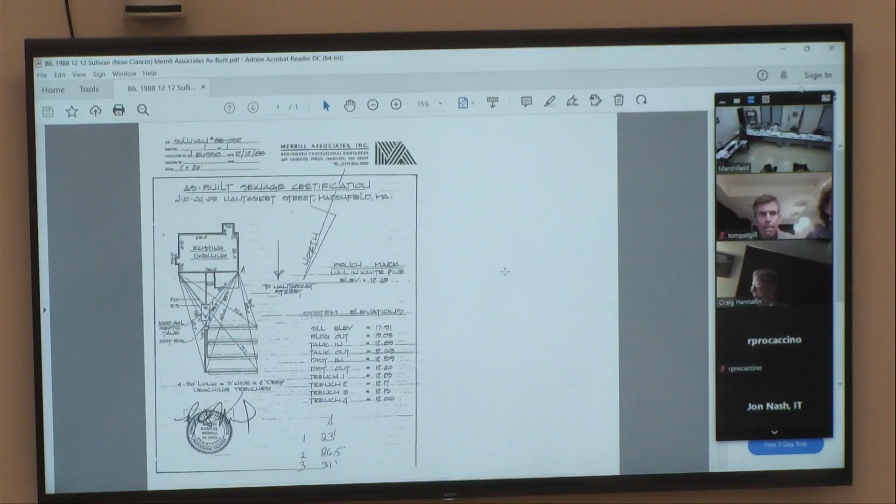So in compliance with the regulations, Massachusetts General Laws Chapter 131 Section 40, Wetlands Protection Act, Code of Town of Marshfield Chapter 294, Wetlands Protection, public hearing will be held for the Marshfield Conservation Commission on Tuesday, February 15th, 2022, to consider the request for determination of applicability filed by Thomas and Patricia Gill, 52 Jackson Street. And the hearing officer is Rick.

Okay, thank you, Bert. So this is a new RDA that we had asked for in one of the earlier meetings, essentially to fill the crawl space in order to make this property FEMA floodplain compliant. The resource areas are Barrier Beach, coastal dune, and land subject to coastal storm flowage. And I can see the taxes are paid. Somebody here that wants to give a quick description of the remaining work to be done to complete the project?

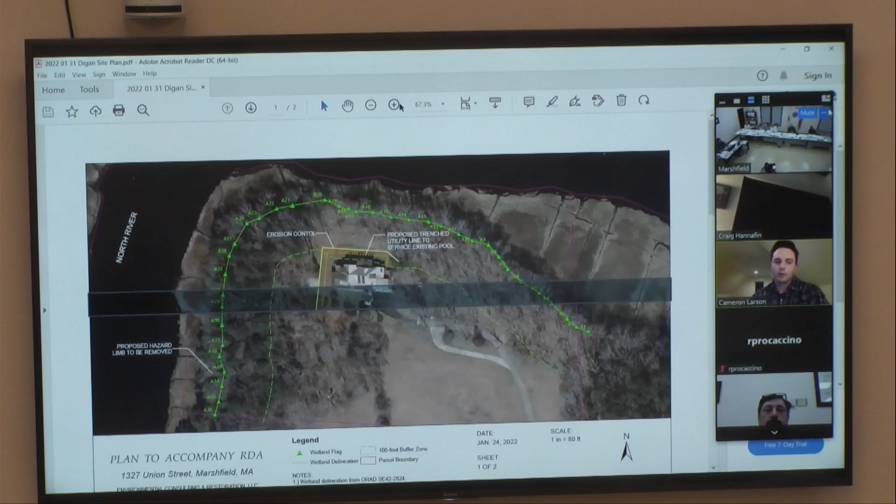The second part of this is the removal of a hazard limb on a red maple down by the dock on this property. Thank you, Bill, sorry. The removal of the limb is on a maple that overhangs a dock. It's severely decayed and poses a risk to the new dock on the property. At this point, the limb has actually been removed. There was a miscommunication on whether that was okay or not.

So we're looking to permit the removal of that through this application, but it has been removed. It was removed by hand, it was just the limb, the red maple itself remains. There was no disturbance to the wetland or vicinity of that tree, and that limb was disposed of off-site. So the two parts of this project are the utility line and the limb removal. We will utilize erosion controls during the installation of the utility, and again, once that's completed, the site will be stabilized. So if the commission has any questions, I'd be happy to address those.

Bill, administrative comments? Well, we were out there, Bert and Susan, Karen, and I, and we were with Brad and did notice the tree limb was missing, and decided that we've all been down the road a little bit too much on this property, and just asked that you remind them that they need to get permits in certain areas, that's all.

On your own recognizance on that. There was also, I don't think there's any issues with the utility line because it's in a lawned area, I think we're all okay with that. But when we were walking around, there's a black corrugated pipe coming out from the pool, it's discharging into the fringe of the wooded area, and we asked Brad to get us an answer.

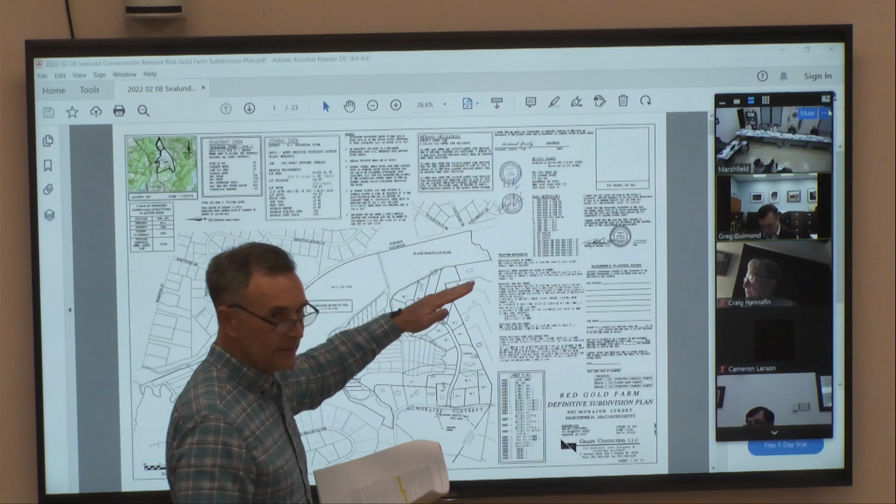If it is a river, we need to determine where the bank full portion is. For the Black Mountain Pond, that would be the current edge of the water, which would be considered bank full condition. So our 200-foot riverfront area would be measured from the existing edge of water, give or take a foot or two, which would probably reach the cul-de-sac. This has a big implication on the final design of where the cul-de-sac is located, so we're hoping the commission can give us input on how you're thinking about this, as far as the pond or the river.

We in no way expect the commission to make a decision on the project tonight, but if we could get some feedback it would be helpful so we can do another round of revisions with the planning board. We anticipate the plan that comes back will include a lot of the open space measures we talked about this evening, as well as hopefully going in the direction of open space residential development. Before I put anybody more to sleep, I'd be glad to turn it over for any questions. A lot of material.

It is a lot of material. Thank you, which is why I had to do this just for myself, just to figure out what I was talking about. Nice job, do you use a mirror? Really nice job. Are there commissioner questions, comments?

I've got a few. On the final page of the plan, can you go to that, Bill? You've got some riverfront information there. What was that based on?

That was based on the fact that, and actually I can even do this from the lead sheet if you'd like, Bill. You want the lead sheet, okay? Lead sheet's fine. Okay, Bert, you got what you want, and then I'll go over to Brady here.

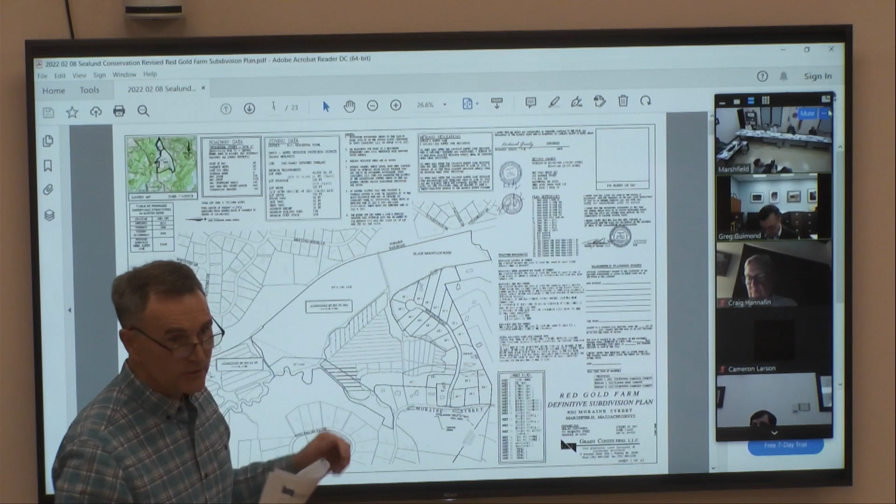Going to the page you just had up before, Bill? I'm going there, hold on a second. So that shows it in relation to the wetlands lines. Oh, I'm sorry, yep, there is some riverfront across Moraine Street as well.

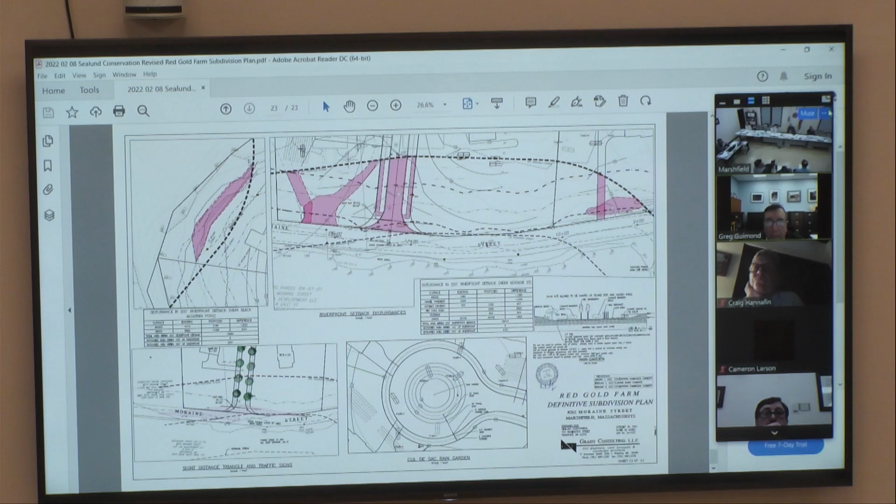Well, the piece on Black Mountain, isn't that Black Mountain Pond the one on the left there, the detail on the left? Or am I wrong? Are you looking at this left one or this one down here? The upper one, I think. That's all based on that corner of the property.

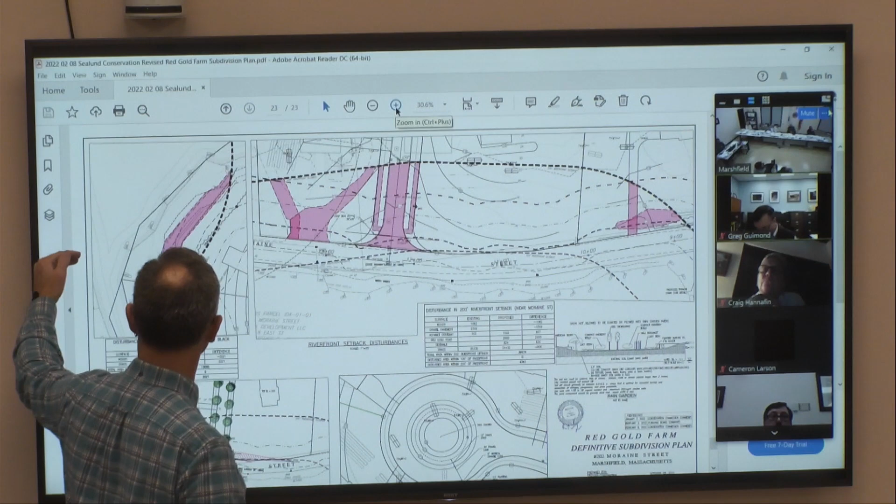And where are the wetland lines there? The wetland line is the dotted line here, and then the riverfront, the river is actually off the page. Is the dotted line the 200, is that correct? Nope, the dotted line would be the bordering vegetated wetland. The 200-foot would be this dark line here, the black one.

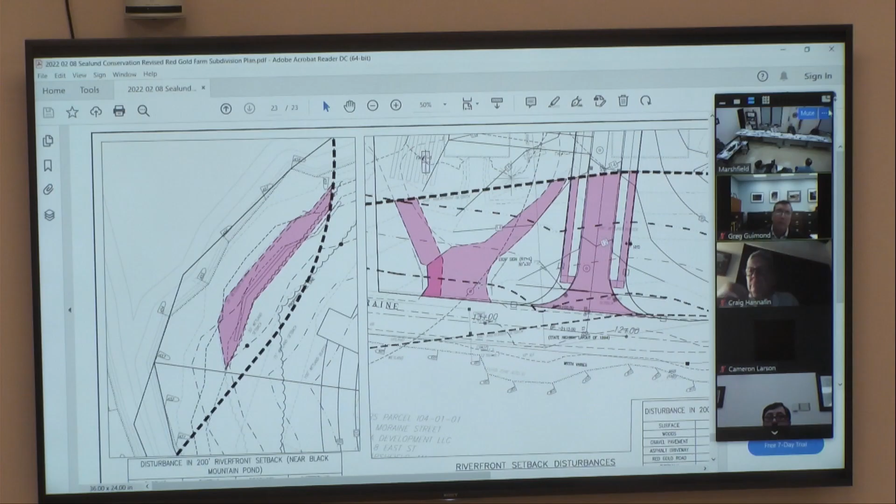Good pickup, Bert. So it does come in the back corner of that property. It does, but that's 200, right? Yeah, I mean 100 would be outside of where the wetland line already is, so it's almost a moot point for that one. But that's not coming from your Black Mountain Pond, if the Black Mountain Pond is a bank-full river.

And then the other question I had about rivers - we couldn't deliberate much during our site visit, but we did speculate about whether there was extensive wetlands on the other side of Moraine Street where that perennial stream is. Where does that perennial stream go to? Does that cross into the area where Moraine Street takes the tight turn there? I believe it does, yeah, I believe it crosses Moraine Street onto the Garrettson property, correct? Yep.

So I think I got what you mean, Bert, let me see if I can. Is that a perennial stream also? Across Moraine Street is a perennial stream.

And just about in here. Yeah, keep going. Yes, we do believe it crosses under, so it goes up through that access area to that lot 23, right? Correct, yes.

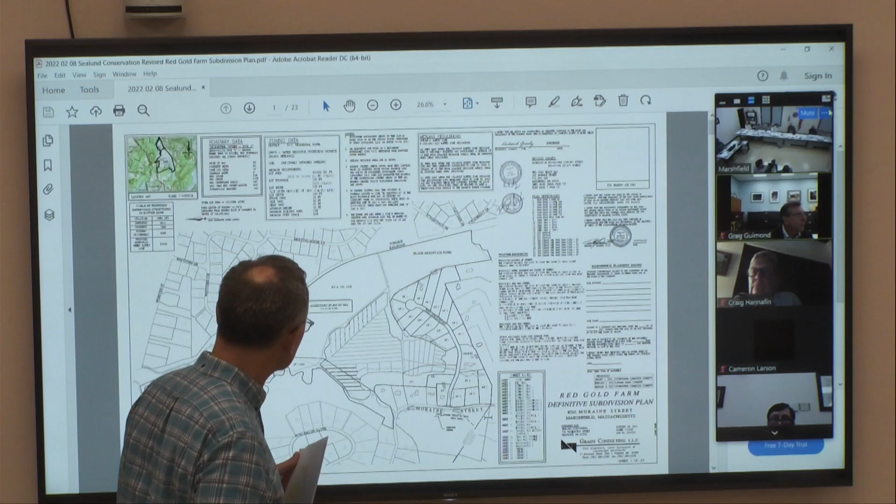Just to understand the lots, is there a lot 4 anywhere? No. What had happened was we had an additional lot with frontage here and a proposed house lot in this area. The planning board in their review had an issue with that lot, and unfortunately we caused some confusion when we eliminated it as a building lot and didn't renumber the rest. So in the next version, we will not skip over it, we will include all the lots.

So Bert, you were asking about the perennial stream. It's right here in this line, I could zoom in more but it calls it out. Right, but I'm more concerned where it goes over onto the Garrettson property, Bill. Yeah, it gets in back here where I'm moving the mouse, it goes in here. And that's, we've had multiple permits. We had one here and we had one over here that was shared by Duxbury.

So I'm looking at 2 separate permits. Okay, so even though there's no construction going on there, well, actually, a further question is, does this open space eliminate the cranberry farming operation? Is that going to cease? No, that's going to remain.

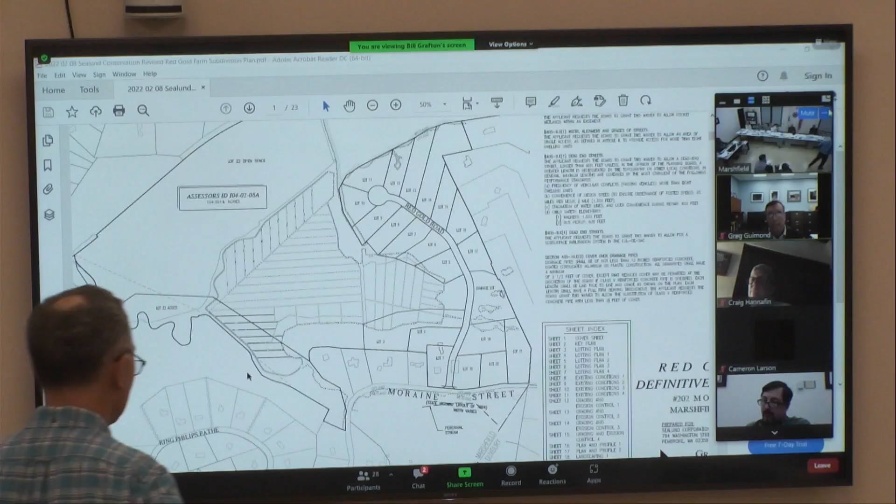I think there might be some interest in general around lot 23 from what the chat's saying to me. Okay, just throwing that out to be fair to the chat. Actually, I do have one other thing to add before it becomes an issue. We had proposed relocating the metal barn building that's there near the entrance over to an area here. We're going to eliminate that request, so that was something that was a touchy subject at the planning board meeting, but we'll be removing that from the plan.

Are there any more questions? I think I've got one last one. Bill, are you satisfied with the wetlands delineation in that area where the road passes? This wetland delineation is within the solid 25?

Yeah, okay. And then the final thing is, with your new plan, will those driveways right along the bog wetland be eliminated? If we're able to pull the houses in closer to the subdivision roadway, so yes. So those are the 1 acre lots then? These are all the 1 acre lots here. Okay, yep. So we're able to rework it so we wouldn't have that long driveway going up by the bog. The open space, I don't really have it submitted for you to see just yet, but it lays out really nicely.

Any other commissioner questions? What about this determination of Black Mountain Pond or the stream? Could we hold discussion for that until after we have public comment? Unless you have specific questions. No, I don't have a specific question, Mr. Grady, I just think that's a discussion point. I'm not trying to put it off, I'm trying to hear from public first, because we did ask them last time to hold off, and so I would like to respect that request, if permissible.

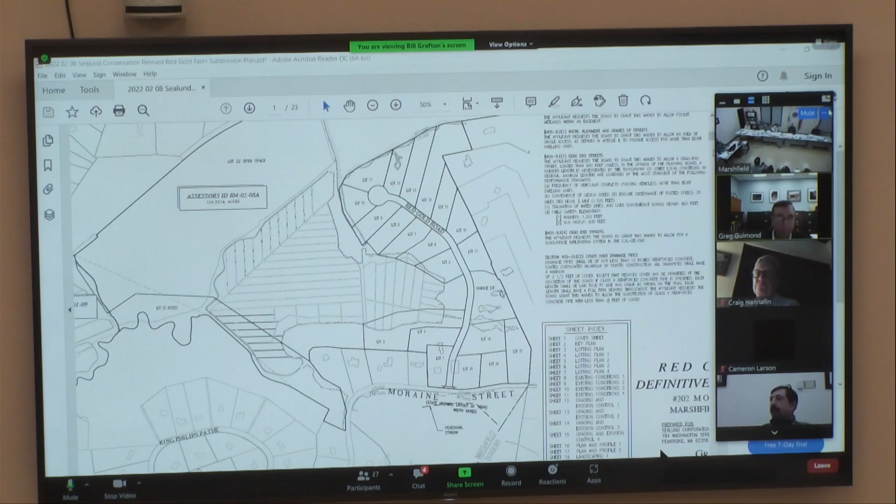This is just about the houses that would go in, the future activities. The concept is you go down to the 50 on this because it's new with the cutting, and I don't think you can go any closer with any structure, even with the mitigation permit. If they go inside the 50 to 75, maybe the mitigation permit kicks in, but then they've got to give 10% back of whatever they alter somewhere else, and that may not work. That's some of the stuff we'd want to vet out. So it's just going to affect two properties, if anything.

So I think I hear that there's a number of questions yet to remain. We can't reach a resolution today. You don't have an intention of asking us to reach a resolution today. May I propose that we continue the hearing? Yes.

Bear with my interpretation of what I'm hearing. Right now we should probably make a decision on our side whether we want to pursue those measurements on the riverine characteristics, or take a look at maybe living with that being a river. We're engineers, we like solid answers, so that's how I'm interpreting it. The scientists like solid answers too.

Okay, understood. So how much time do you think you would want to think about these things? I'm sure Bill would be more than pleased to help answer any questions you feel would be appropriate. I think we need about 2 weeks to do what we need to do to get back to you guys. So scheduling a meeting 2 weeks from tonight is a little too early, because it wouldn't give Bill adequate time to look at it. So I'll suggest roughly 3 weeks out.

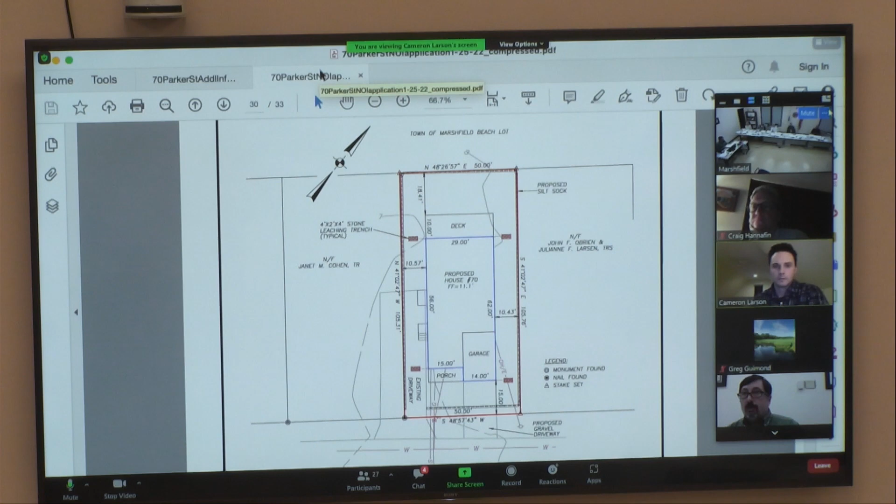When I looked at it again today, Susan, I didn't get a chance to talk to you, but when you look at the plan, Cameron, can we go to the one with the mitigation planting plan on it, please? There it is. Notice that the conservation markers in the middle and on the right are down gradient, away from the protected area. The thought was maybe they should get pushed up gradient so that they actually protect it. Otherwise, that mitigation area might not last very long.

You know what I mean? I'm not saying it will, I'm not saying it won't, but the commission has this opportunity. So maybe move the one on the right-hand side closer to the house to give protection, and maybe move the center one closer to the house too. Now you have a true wetland, or an improved area, and it's a dune environment, a really beautiful dune. If you go to the other edge, it's really lovely.

Yeah, one of the best you'll see. Cameron, does that seem like it would be a problem for the yard? It's actually all just natural vegetation anyway. I don't see that being an issue. I think it would be perfectly fine to relocate those posts along the edge of that mitigation area, that would be perfectly appropriate.

This is a great plan, and we want to make sure it actually happens. So the implementation and the monitoring, is two years going to be adequate? And then, what's the trigger point to get this started? This mitigation isn't required for some kind of cutting or anything like that, this is a positive thing.

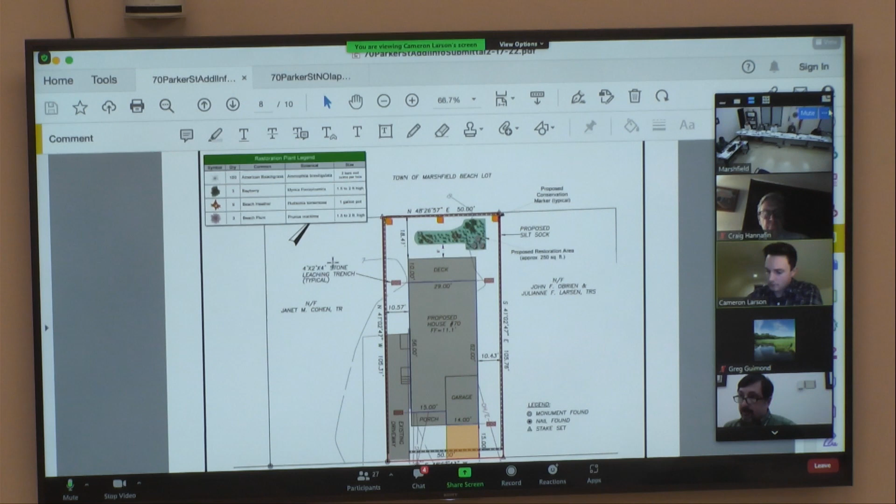I just have one question on this, and maybe I could ask Mr. Finn, since he's working on the possible revisions.

Weren't we headed towards letting the building department handle the building requirements? That's correct, we want to get out of this business.

I agree with that, but we're not there yet, though. Right now we're in a gray space, so we're trying to give a solution. I'm trying to kill the 50% to give them flexibility, but these comments are making me have to do this, till we get the codes fixed. So if 50% is acceptable to you, we can include that in the order of conditions, 50% open space between the slats.

Is that 50% total? I was going to kill it, because I heard that from CZM. So we don't need to include that? Yeah, but I'm from Missouri, so you've got to show me, I want to see it in writing, you know?

So, sorry to interrupt, but you do not have confirmation of that from CZM yet, do you, Bill? I have not got it in writing, and that is not confirmation because I do not have it in writing. I've just heard from a professional expert, which we all respect.

Okay, but I think before we can really go there, we must determine and clarify that it's accurate. Exactly. Okay, I'll take the 50% out, or take the whole thing out?

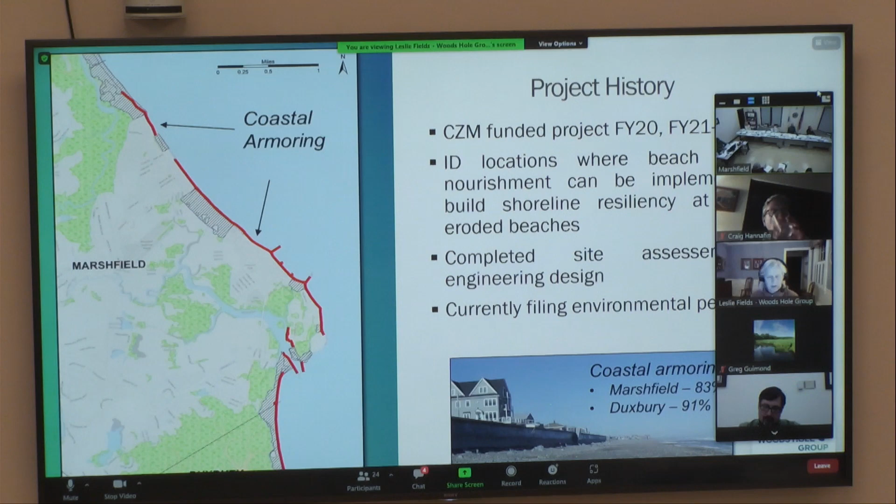So the sites that were identified as being feasible for beach and or dune nourishment, there's 4 of them: Rexhame Beach, the public beach, Winslow Ave Beach, Fieldston and Sunrise, and then Bay Ave in Marshfield, extending on into the Gurnet Road Beach in Duxbury.

This notice of intent that's before you only has 3 of those sites. So it has Rexhame, Winslow, and Bay Ave, the part in Marshfield.

We don't have Fieldston and Sunrise in this application because we weren't able to get all of the easements signed from those homeowners, allowing rights for the public to pass along beaches that are nourished using public funds. So in the future, if those easements are signed, it's possible the town could come in and amend this order of conditions, assuming we get one, to allow beach nourishment at Fieldston and Sunrise. But right now, this application only has the 3 beaches in it.

So I'm just going to go through each one and tell you a little bit about what the design looks like, the resource areas, and the benefits.

So this is the Rexhame Public Beach Site. The nourishment encompasses 8.2 acres, and it's designed to hold 33,870 cubic yards of fine to medium grade sand. It extends over 1,650 linear feet.

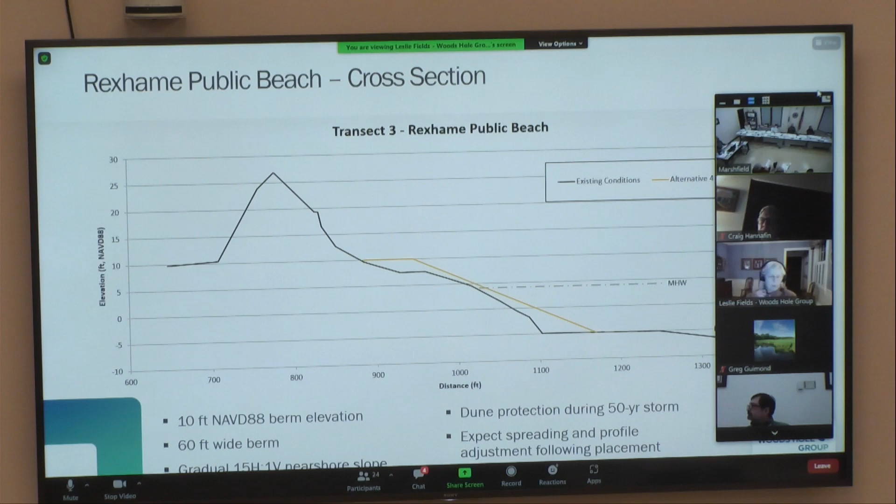The next site is what we're calling the Winslow Ave beach site. So that's from Porter Street to Rexhame Road. It encompasses 4.5 acres and has been designed to hold 17,850 cubic yards. That's a mixture of cobble, gravel, and sand-sized sediment to match what's there right now. The dune nourishment would extend over 1,540 linear feet, all Town of Marshfield property.

And the benefits of this project are storm damage protection for the properties landward of the dune nourishment. Resources impacted are coastal beach, coastal dune, and land subject to coastal storm flowage.

This particular design will provide flood and wave protection for the developed properties landward of it during storms up to the 50-year event. The public should expect modifications of this design with storms starting at the 10-year event. Anything at the 10-year event or bigger is going to modify the shape of this design, and we need to understand that post-storm renourishment may be needed depending on the frequency and severity of the storms.

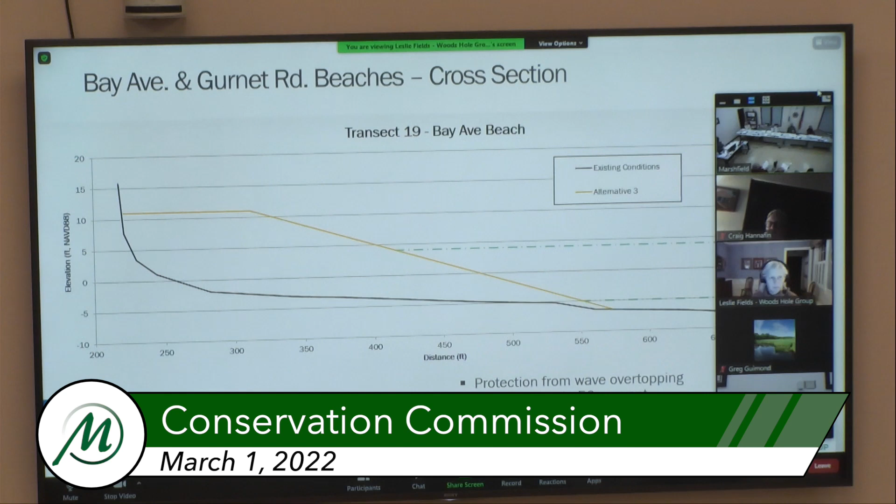Here's the profile. This is the seawall right here. You can see that the beach really drops down quite low right in front of the seawall. So we've designed a berm at elevation 11 feet in NAVD 88. It's 90 feet wide with a very gradual slope of 15 horizontal to 1 until it meets the natural grade. This is mean high water right here, and this particular design pushes mean high water seaward by about 170 feet from its current location.

It does provide protection from wave overtopping for storms up to the 50-year event. Obviously, as this beach nourishment spreads and the profile readjusts, this level of protection from wave overtopping is going to drop. But as designed here, and if maintained in roughly the same configuration, you'll get protection up to the 50-year event. We are estimating that renourishment would need to occur about every 2 to 5 years if the town wants to maintain this profile.

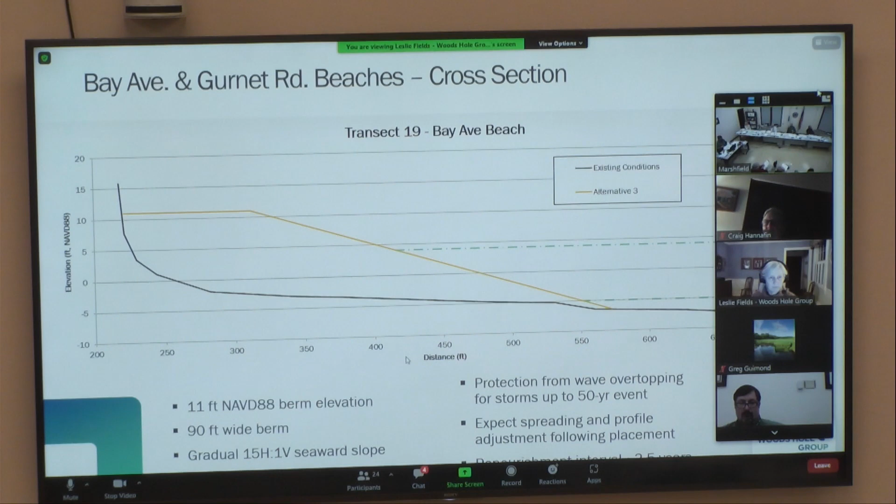I also wanted to talk about the sources of the nourishment material and make it clear to the commission that this notice of intent is only asking for permission to permit the nourishment. It's not permitting a particular source. We are asking for the flexibility to use a variety of sources, provided that material is compatible with the existing beaches. I've listed some options or possibilities for sources here.

One, the town may decide to truck material in from the upland to some of these sites. Another option would be beneficial reuse from nearby dredging projects. We know that Green Harbor is dredged either every year or every 2 or 3 years, taking out upwards of 30,000 cubic yards per year. So once permitted, the town would have the ability to take material from this Green Harbor dredging project and put it on these beaches.

There's also the South River dredging that happens every once in a while, which is also a possible source for, say, the Rexhame Public Beach area, and any other federal navigation dredging projects that are around as well. A third source would be a potential offshore borrow site.

I just showed a picture of one over here on the left, which is one that Woods Hole Group permitted in the town of Sandwich, offshore Scusset Beach. Essentially, that's permitting some sort of offshore site where material could be mined or dredged and pumped up onto the beaches to provide a source of beach nourishment. This is a picture of, I think, the Currituck a couple of years ago, dredging inside Green Harbor.

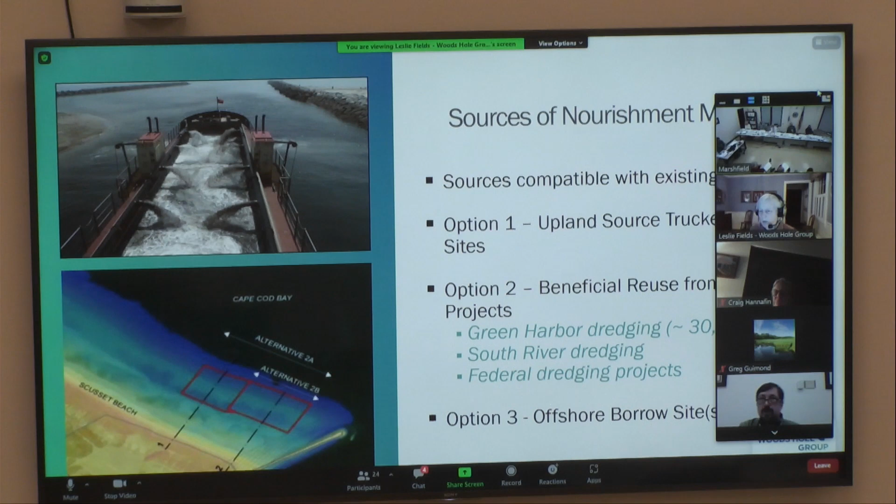The purpose of the project is really just to get these permits in place so the towns can nourish with material from existing projects, or if they want to go out and get grants for the full-blown nourishment project, that's also a possibility. And that's it, so I'll stop sharing and open it up to questions.

Thank you. One formality, Bill—I forgot to ask about taxes, abutters, and the DEP number. We've submitted a request for a waiver of the filing fees. Taxes are exempt, and the abutters—Liz had checked this out, it would be right there on the cover. I'll check it out, I think we're okay on that. Okay, abutters I know we notified a lot of. Yeah, they're there. Yeah, very good. Thank you.

How about access for the various areas? Could you just run us through that? Yeah, I'm going to go back to my map.

Construction access for Rexhame Beach is going to be via Parker Street, right here. We can also come up through the dunes, but I think the preference would be to go along Parker Street and then right here, down the beach. That's for Rexhame Public. For Winslow Ave, we're talking either Rexhame Road or Porter Street, so down here, or Porter Street up here.

And for Bay Ave, we're talking about the Bay Ave beach access. I think it's right here, right here somewhere, a little down lower, heading toward Duxbury, right here? Yeah, right at the line. I can't see very well, but that's right in good, the line, okay, thanks. Not taking our stuff into Duxbury. No, it's not going there anyway, get the road, that's right. Yeah, but a fair piece of theirs is going to come our direction too, that's coming back in.